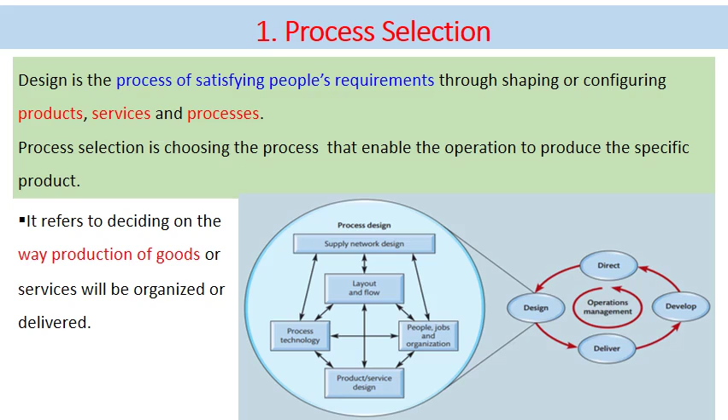In the previous discussion, we defined operation management as the activities of directing, developing, delivering, and designing activities in organizations. This designing part includes both process design as well as product design. By the way, product design and process design cannot be conducted in isolation. We are doing process design as far as there is product design. This figure clearly shows that the design of the process cannot be done independent of the service or the product that they are creating.

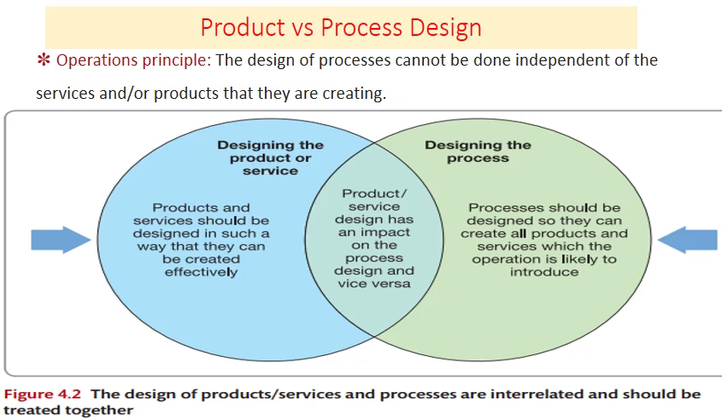Once we have a product or service that we are creating, there should be a process designed so they can create all the products and services which the operation is likely to introduce. So as there is product selection, there should also be process selection. We are doing them together. We cannot do product design without process design. If there is a new product design, there should also be a new process so as to produce that new product or new service.

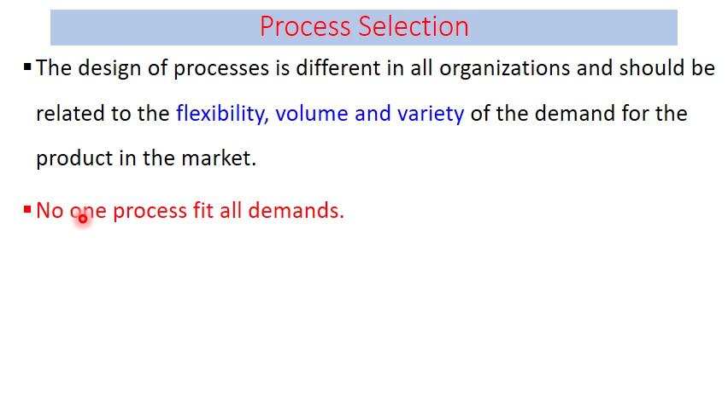From here onwards, we will see the types of processes. The types of process are categorized based on the volume and the variety of the products. According to the volume of production, that means how much product we are going to produce, and the variety of the products in the process, we can categorize into two major divisions and also into 5 subdivisions. We have to have many process selections, because no one process fits all the demands of the consumers. Some consumers want specific special equipment or special products according to their specification, and others may need common types of goods and services. In general, no single process fits all the required demands of the consumers.

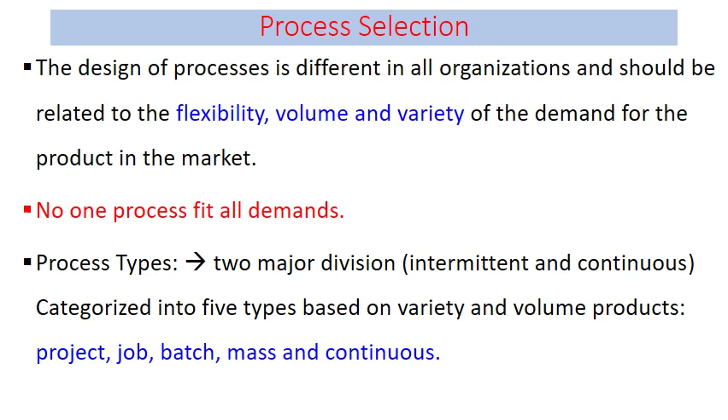So process types can be divided into two major divisions, intermittent and continuous, according to the volume, the flexibility, and the variety of the products. We can also categorize into 5 types based on variety and volume of the products, which are project, job, batch, mass, and continuous. First, let's see the project process. The project process has high variety of product and low volume of product. It is used to make products based on customer specification. This is the reason behind the high variety. We will use this process when we are requested to produce according to the customer's specification.

If we take the example of the Grand Ethiopian Renaissance Dam project, probably there is no other project which is exactly the same as this project. This project is required by Ethiopia, so it has a different specification, a specialized specification which is applied only in this dam. Because of the customer specification, there is high variety but low volume. For example, this project is a single project. It is constructed based on the Ethiopian government specification.

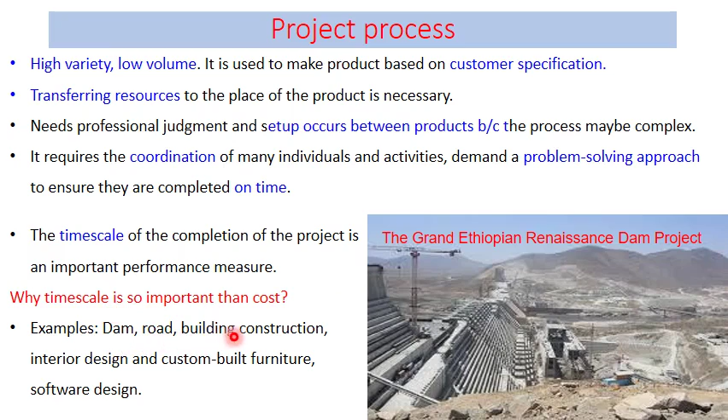Some specific examples of the project process are a dam, road, building construction, interior design, custom-built furniture, software, and so on. This is the second process, that is the jobbing process. The jobbing process is characterized by high variety and low volumes, just like the project process. Many jobs will probably never be repeated, and some may be repeated.

Unlike the project that we discussed before, the product shares resources with many others. In this case, a general purpose machine may be used to satisfy different needs of the customers. This craftsman, for example, is using a general purpose wood cutting machine in order to produce different types of woodwork products.

Relatively, it is less complex than the project. However, they usually produce physically smaller products. Unlike the project process, it produces smaller products and sometimes requires considerable skill. And such processes often involve fewer unpredictable circumstances.

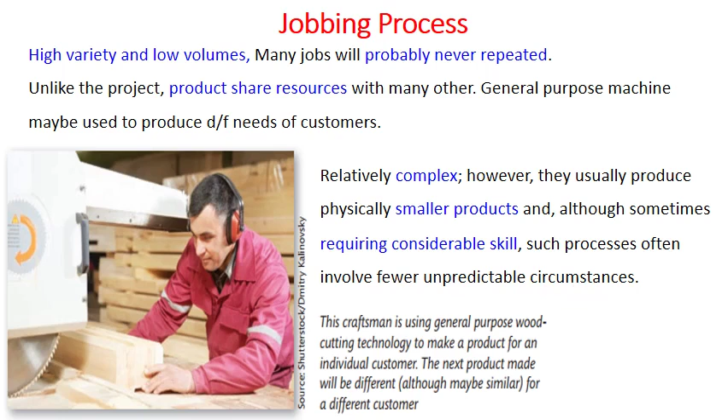That means we are sure what we are going to produce. We know what we produce. There is no challenge, no unpredictable things that we face in the process. Unlike the project process, here there is less unpredictability.

And the third one is the batch process. It's characterized by medium variety and medium volume of products, and may look like the jobbing process, but does not have the same degree of variety. If the size of the batch is just 2 or 3 items, it is little different from jobbing. It's almost similar to jobbing.

And the name indicates that each time more than one item is produced. Within a batch, there are a lot of items. Periodically, the process repeats. After one batch, the second batch will be produced. And the products are grouped as they move through the process, from initial to final, so we can categorize the groups into batches.

If we consider university classes, we can categorize the first year batch, the second year batch, the graduating batch, and so on. So along the process in the university, we can classify students into different batches.

And setup occurs between the batches. Once we finish one batch, setup occurs. And resources are shared between the batches. Resources are also shared between the batches in the university. Within the university, the classrooms are used for different batches of students.

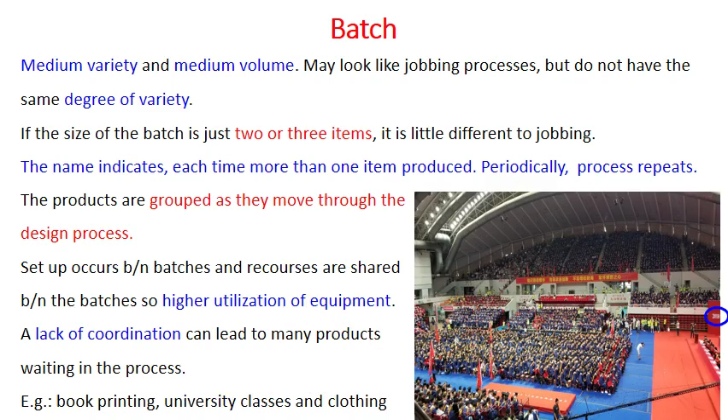They are using common resources. So a lack of coordination can lead to many products waiting in the process. For example, book printing, university classes, and clothing are examples of batch process. And the next is line or mass process. This process is characterized by high volume and low variety, and is usually repetitive and largely predictable. Types of products: because there is low variety, we can predict the product.

The movement of the product may be automated using a conveyor system. Here we can use an automatic machine like a conveyor system, and the production process is broken down into a number of small and simple tasks. And we can use specialization here by dividing the tasks into a number of small tasks. Due to low variety, setup of the equipment is minimized, and utilization of the equipment is high. We can utilize the machines highly.

High volumes of product result in cost effectiveness. Because of high volume, we can be cost effective. This results in it being cost effective to use specialized labor and equipment, because our cost with regard to a single product will be less. Because of the higher volume of production, the cost per product is lower.

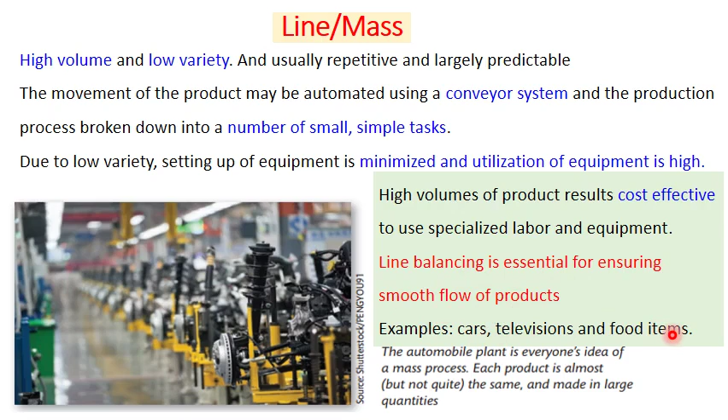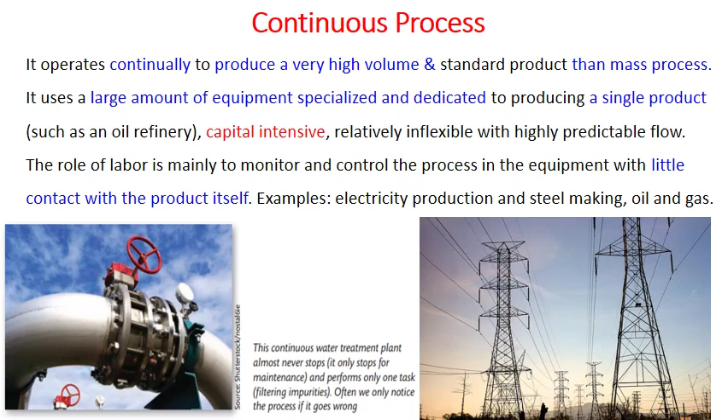To provide this mass service, all staff have defined divisions of labor and have to follow a set of standardized procedures in order to serve this huge number of customers. For example, supermarkets, railway networks, an airport, teleservice, library, and police service are some examples of mass service. And the second is service shop.

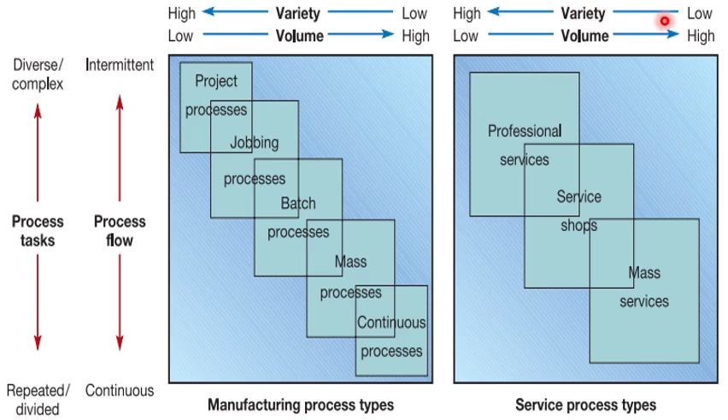In terms of process flow, the continuous process and the mass process may be categorized as continuous process, and the project process and the jobbing process can be categorized into intermittent process flows. According to the process tasks, these end processes are characterized by diverse and complex tasks, whereas this end process is characterized by repeated and divided tasks. And the same is true for the service process types. The professional service is characterized by high variety and low volume, whereas the mass service is characterized by low variety.

In terms of critical resource, the intermittent operation is labor intensive; workers' skill is important here. But repetitive operation is capital intensive, so equipment, automation, and technology are very important. Types of equipment: general purpose for intermittent, and specialized, dedicated equipment for repetitive. Degree of automation is low for intermittent because it is labor intensive, whereas repetitive operation has very high automation. Throughput time is longer for intermittent and shorter for repetitive because we use specialized, automated equipment. Work in process inventory: more is found in intermittent operation, whereas less in repetitive.

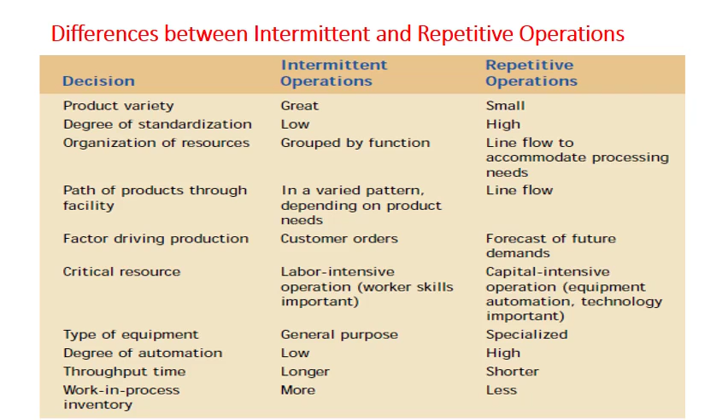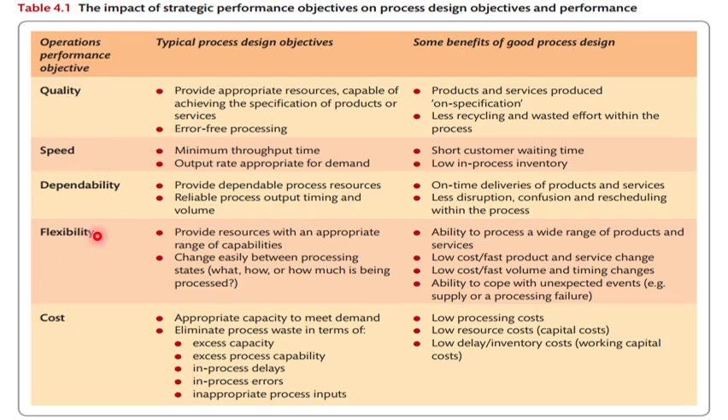We can achieve these operation performance objectives. These are operation performance objectives. Let's do one example. Before doing the example, let us see: throughput time equals work in progress times cycle time. Throughput time means the time required to accomplish one activity. The total time required to achieve an activity equals work in progress times cycle time.

Cycle time is the time required to serve a person. For example, if 10 people are in the system, that is the work in progress, and 1 minute is required for serving a person, the throughput time equals 10 times 1, that is 10 minutes. 10 minutes is the total time required to serve 10 people.

Let's do the example. Every year it was the same. All the workstations in the building had to be renovated. That means renovation is done every year; it is a usual process. Tested, new software installed, etc. And there was only 1 week in which to do it. The 1 week fell in the middle of the August vacation period, when the renovation process would cause minimum disruption to the normal working hours.

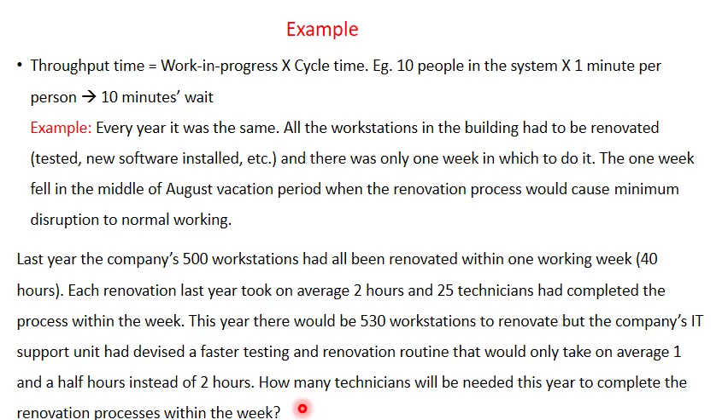This year, there would be 530 workstations to renovate, that is, the workstations increase by 30, but the company's IT support unit had devised a faster testing and renovation routine that would only take on average 1.5 hours instead of 2 hours. Thus, how many technicians will be needed this year to complete the renovation process within a week, that means 40 hours?

We know that throughput time equals work in progress times cycle time. Last year work in progress is 500, but this year 530, and the time available for both years is 40 hours. Average time to renovate last year was 2 hours, but for this year it is 1.5 hours. So the throughput time required is work in progress times 2 hours. That means 1,000 hours needed by 1 employee.

Since we only have 40 hours, we need to divide 1,000 hours by 40, so we get 25. So these 25 employees can accomplish the 500 workstation task within 40 hours. And the same is true for this year. We also use the same procedure.